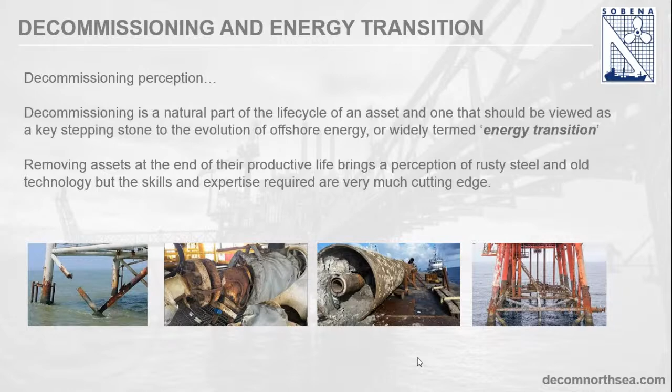The reality of decommissioning is it involves a lot of managing unknowns. And now, from an engineering point of view, that is exciting as well as challenging. It also involves controlling a lot of contaminants.

At the same time, you have to be very focused that decommissioning is perceived as a cost. So managing the costs while maintaining the safety standards takes a lot of focus and dedication. The safety standards also come into the environmental standards. The risk for damage to the environment is greater in the decommissioning stage than in any other. So the commitment to doing things right, not just safe, but doing the right thing, is a key part of the mentality around decommissioning.

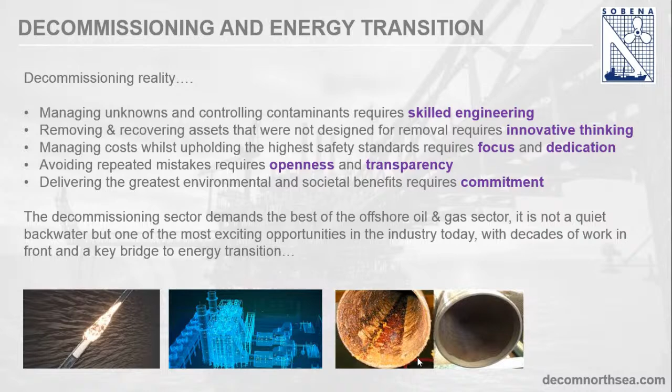So I guess if there's one thing I want to leave with you is you heard about the scale of the opportunity, you've heard about the changes in regulations and the fact that there's process, but the innovation required is not just about technology. It really is about a mindset and an approach.

I'll illustrate that with just a few numbers here. So new or advances in technology, and these are general numbers I've aggregated from different countries and around the world, so it's just a rule of thumb. The new advances of technology are estimated to reduce the cost by less than 2%. What that really says is a lot of the major advances in technology have been made.

We are still looking and very keen to make sure that there is more innovation, and you're going to hear some great ideas this afternoon. But there's no magic bullet that's suddenly going to reduce costs substantially. The way to reduce costs are going to come from taking the lessons and the experience from elsewhere and applying them so that you can manage and control those costs and the associated risks.

So effective sharing of the lessons and the gained experience, that can have a reduction in the cost of over 10%. A lot of that is making sure that your cost targets are hit. Overruns are very expensive. And a big impact on the risks, because a lot of those lessons are around managing the risks, avoiding the mistakes.

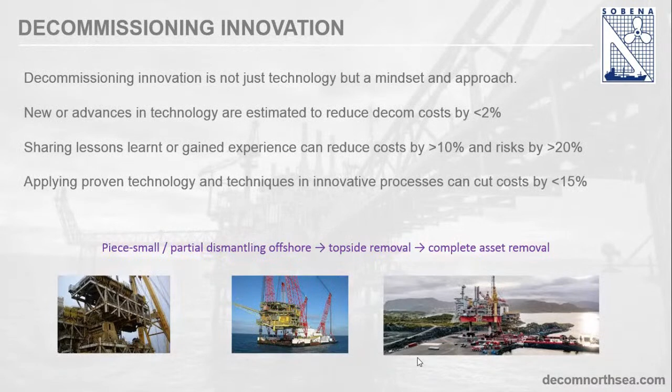So on that note, I'll just summarize. Most of the challenges, not all, because there's always the opportunity for something new, most of the challenges that you will come across in decommissioning have been met before.

Part of the challenge is finding the people and the experience that you can gain the knowledge from. The current knowledge bank, though, is vast and it continues to grow. And it's the most open part of the life cycle. People are generally quite happy to share.

Even down to the fact that for a number of operators and service companies, there's little commercial gain in not sharing, much more gain to be more open and to share that knowledge and share the benefit that comes from that. So the simple questions we all ask: how do I plug and abandon that well?

How do I recover that flow line? How do I clean inside? Do I lift the conductors in one piece or do it separately? These are standard questions, and the processes you've been talked about, there's a knowledge bank to go alongside that.

Most of that knowledge bank sits in the supply chain companies, and in some cases more sits with the companies in the supply chain than it does with the oil companies, the operators. So it was mentioned the need to look at partnerships in the past. That's very much the way the community, we call it the decommissioning community, that's the way it works.

As part of the university, which is my work, I'm always happy to see somebody bringing the innovative part of the work to decommissioning, because most people think that decommissioning is a job that is easier, and it's simple and can be done in a way that is always done.

But there is a lot of challenges in this, and innovation would benefit a lot for the oil companies, for reducing costs in these operations. It's quite important. Thank you very much.

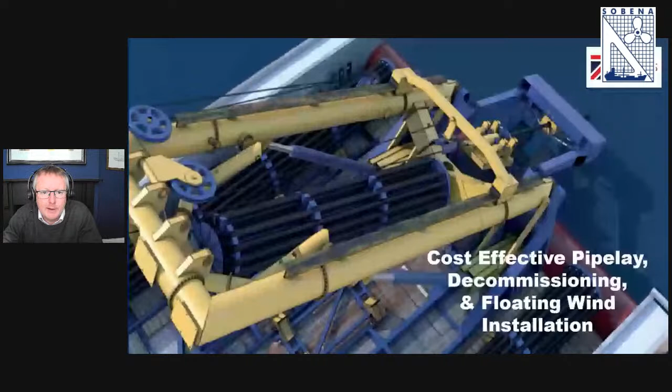Since establishing in 2017, we have developed a series of patent pending products for cost-effective pipe lay, pipeline decommissioning, and floating offshore wind installation, all utilizing smaller, cheaper vessels coupled with our innovative equipment to offer significant cost savings to clients. The ideas behind the system were conceived almost a decade ago.

Since spinning out the concept into Laytrix, we've been able to develop the technology through the support of our shareholders, including Mercia Asset Management, a venture capital firm who've invested by the Northern Powerhouse Investment Fund, which is backed by the British Business Bank and the British government.

The images on the screen show the system in its pipe lay mode and in a further flexible installation mode. We believe the system is unique in that it can install and recover rigid and flexible pipelines, cables, umbilicals, and bundles, all utilizing the same core structural and mechanical modules. As such, we deem this the world's most universal vessel asset.

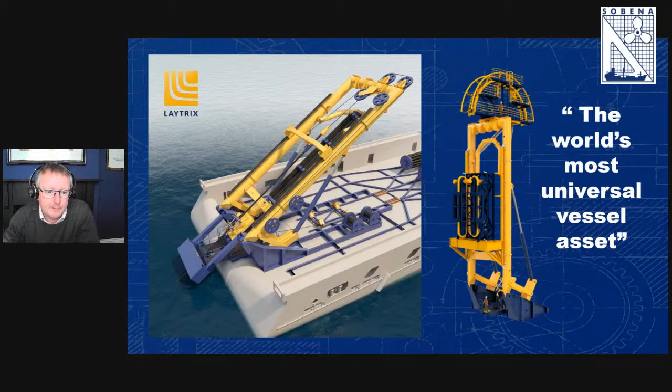So finally, on the business, Laytrix is targeting to meet 7 of the UN 17 Sustainable Development Goals, and we hope to achieve these by reducing the cost of offshore wind, using local content within our system builds, utilizing our innovative patent pending designs targeting carbon capture and storage alongside offshore wind, helping to clean up the seabed via our decommissioning spread, and maybe most importantly, utilizing global partnerships and a collaborative approach in everything that we do.

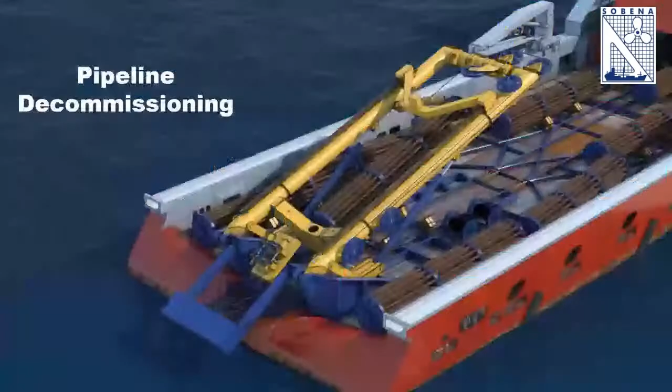So today's webinar topic is on decommissioning, and I'm going to concentrate on this mode of operation and try to explain the principles behind the system, the benefits we feel that it brings, and the large cost savings that can be attained using a different, innovative approach to decommissioning.

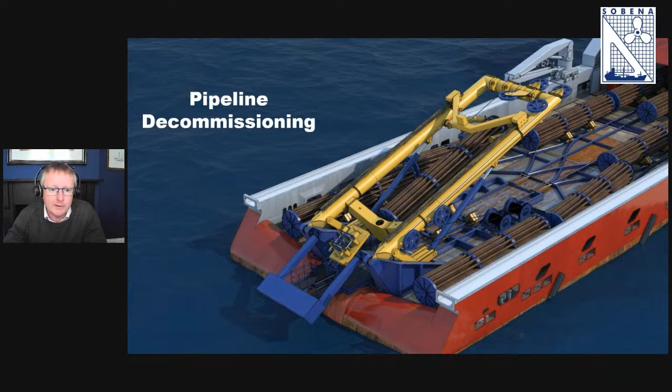I'm going to provide some thoughts from Latrix's perspective on opportunities within the Brazilian market. I'm going to share the results of a series of studies we've undertaken for several clients around the globe.

So the main design driver behind the system is that all the core elements, so structural, mechanical, hydraulic, and control, are all based on existing tried and tested offshore technologies. By combining these together in an innovative manner, we have a new build system which lowers the technical risk with a high TRL, or technical readiness level.

So some examples of the technologies that we've built into the system include ROV launch and recovery systems, bucket linkage designs for wide-angle A-frames, and components from carousel central bearings and reel drive systems. These are all areas where the design team have previous experience and are all items that are in everyday use in the offshore sector around the globe.

And finally, the design basis is against a range of internationally recognized design codes, including DNV and the Lloyd's Code for lifting appliances in a marine environment.

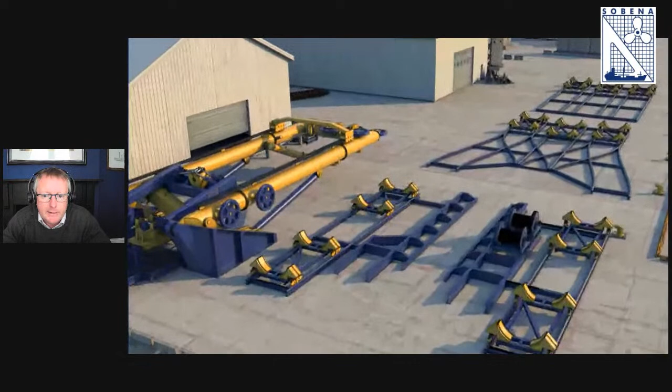So I'll finish on the engineering front, which is a key driver for the business, with a short animation which shows the system in pipeline decommissioning mode, which hopefully helps you to visualize it in operation.

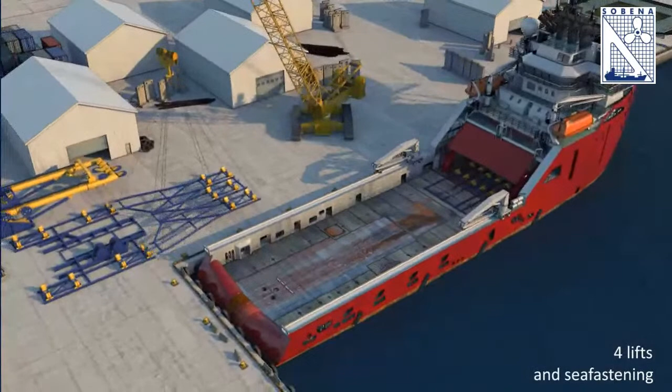So the system is designed for quick mobilizations, i.e. installing it on a vessel as quickly and cost effectively as possible. And we're looking to use vessels of opportunity, so ships that can be chartered on a daily basis with good availability across the globe, avoiding the more expensive and specialist ships. So examples would be PSVs, platform supply vessels, or anchor handlers.

So as a comparison, a platform supply vessel or anchor handler would typically cost in the region of $25,000 per day. And this would compare to $250,000 upwards for a dedicated pipeline vessel.

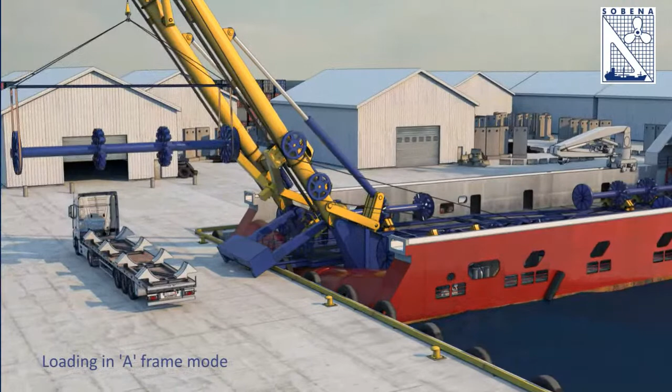So the system is patent pending, covering installation and retrieval of catenaries, which covers a wide range of service sectors and applications.

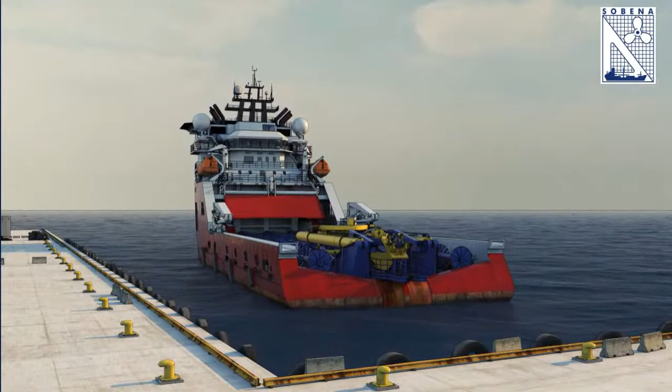So as I said, all of the components within the system are based on tried and tested technologies, and we've simply brought these aspects together in an innovative way, reducing the technical risk significantly.

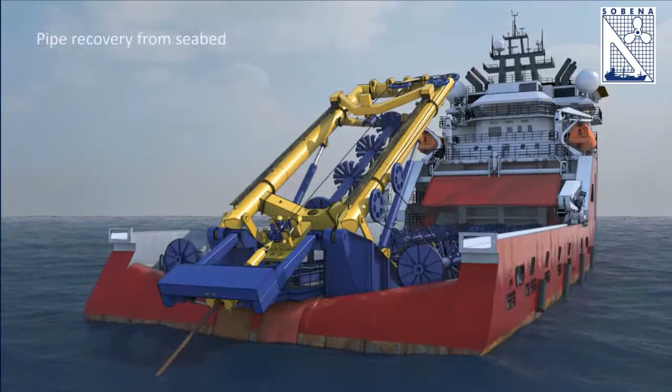So once the vessel's moved to location via an ROV, it will go down and latch on to the end of a pipeline and bring it up into our tower system. The system has two sets of clamps, a traveling upper clamp and a lower fixed hang-off clamp, and the process that we're calling a reverse J-lay process.

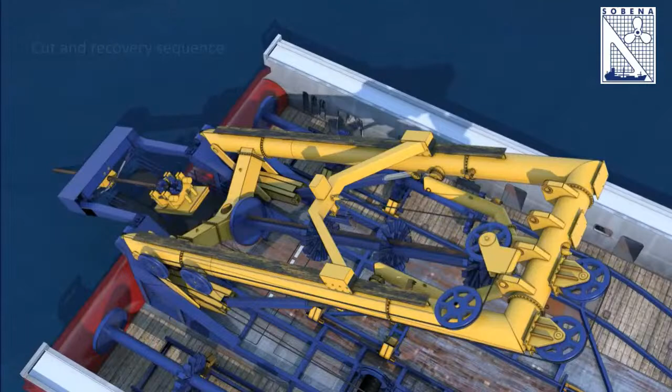We haul in a section of the catenary, it's clamped at the bottom, and using cutting equipment, it's removed and it's inserted into a pipeline cassette.

The process is repeated until the cassette is full, at which point the tower is folded to the deck while the catenary remains held in the lower hang-off clamp. The full cassette can then be removed, and an empty cassette can be placed back into the tower. The tower can move back to the required catenary angle, and the operations can continue.

So depending on the length and the type of product being recovered will dictate the type of vessel that can be used, the ideal deck footprint area, and the number of journeys.

Once the vessel's returned to port, we can put the system into what we call A-frame mode, which allows us to load and self-unload, effectively using a crane at the end of the vessel. This increases the range of vessels that we can use and helps drive down the costs. It also allows us to use harbours which haven't got dedicated quayside craneage.

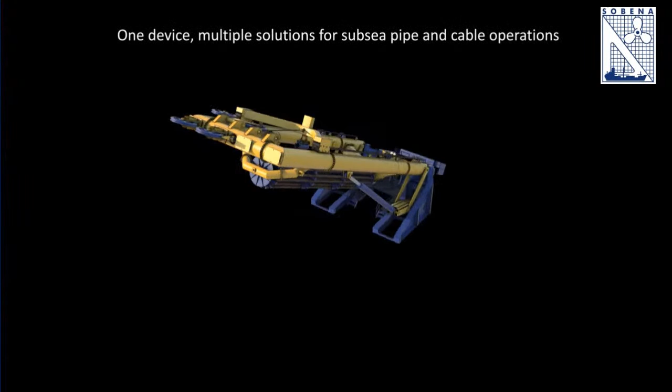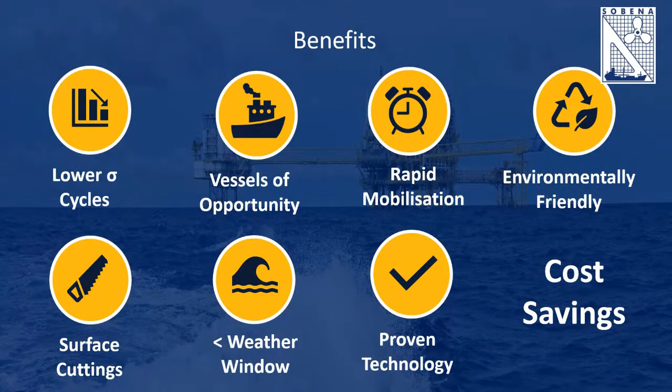We believe the benefits of our system over existing practices such as reverse relay and subsea cutting and grabbing are many, both from a technical and commercial perspective. The system is safer to use, avoids subsea working and cutting practices, ensures any spillages and cutting materials are contained on deck, and allows operations in increased weather windows and with vessels of opportunity, which can be utilised in smaller ports or harbours with decreased draft. All of this leads to significant cost savings which are passed on to the end user.

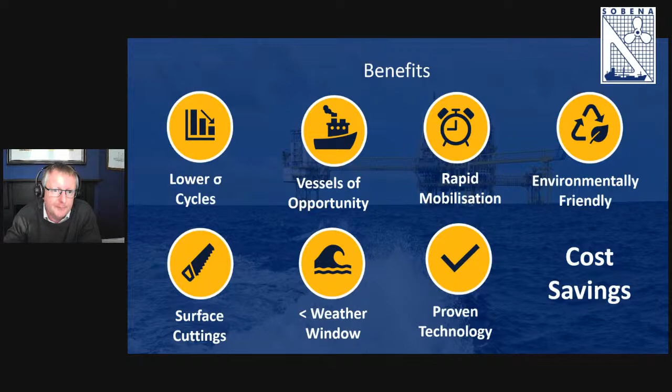In the UK, around 48% of the pipelines are within the sweet spot of our system, which is looking at diameters in the range of 2 inches to 16 inches, which fits in with the capacities of our cassette-based system.

Above these diameters, our system can still be used, but without the cassette, for recovery of larger diameter pipelines or bundles, with the sections cut from the catenary and lowered from the tower onto deck trolleys, which take the place of the cassettes within the tower. If you're interested in finding more about that, you can view a bundle recovery animation on our website.

Turning our focus to Brazil, Laytrix has been involved in discussions with the Brazilian market over the last 8 months, with support from the UK Department for International Trade. We're starting to see some real momentum in the sector and projects coming out to tender.

As Mauro mentioned in the first session today, the announcement before Christmas of the Petrobras tender for engineering, preparation, removal and disposal of almost 1,000 kilometres of flexible pipeline with a mass of over 55,000 tons shows one of the major opportunities within the Brazilian market, and something that we hope we can play our part in reducing the total decommissioning costs in the sector.

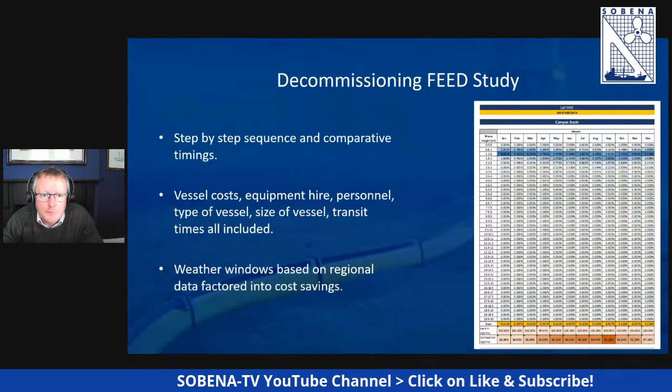Over the last 12 months, we've undertaken a range of different desktop studies or feasibility studies for operators across the globe, including pipeline and bundle recovery projects in the North Sea, projects in the Far East and projects in Brazil. Over the next couple of slides, I'd like to share some of the results of this work.

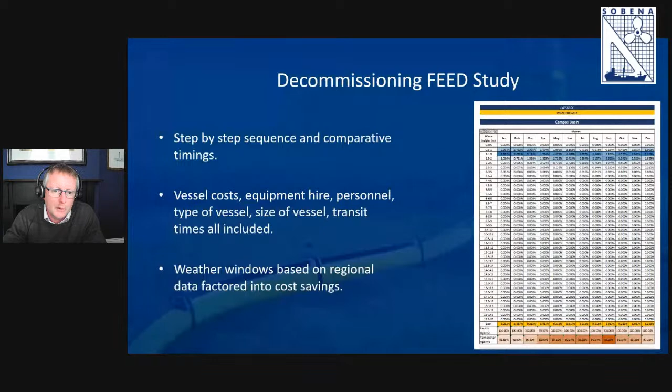All of the studies have compared the costs and timescales using a large number of inputs, including vessel rates, equipment rental costs, personnel costs, step-by-step operational sequences, and regional weather windows and wave height limitations to build in the probability of time delays during planned operations. Our costing software, developed internally, also examines the field location, port and harbour locations, and respective transit times and distances, and the resulting costs, which are all built into the comparative assessment.

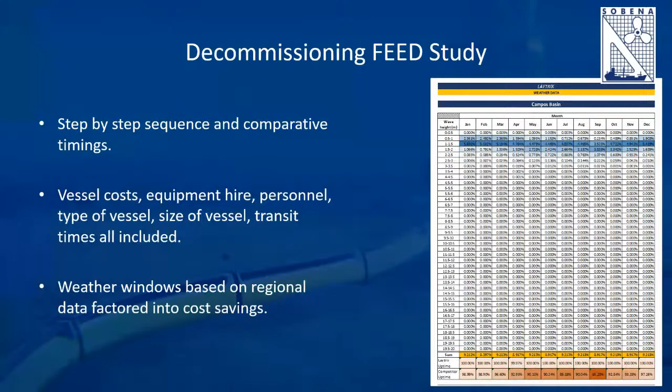I'll give two examples. The first case study summarises a desktop report undertaken on behalf of an American operator for one of their business units in the Far East. This looked at recovering multiple pipelines of various lengths and sizes in the range of 2.5 inches to 15 inches in diameter in water depth around 150 metres.

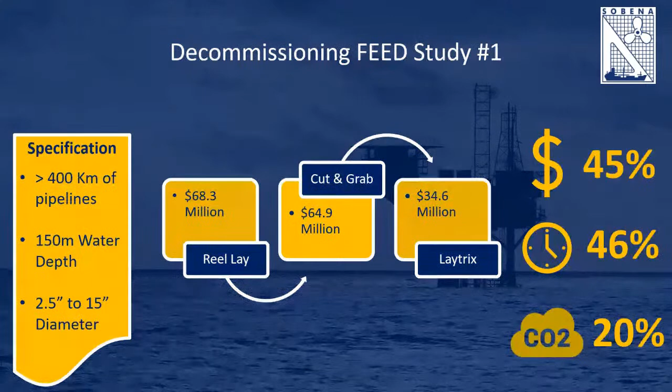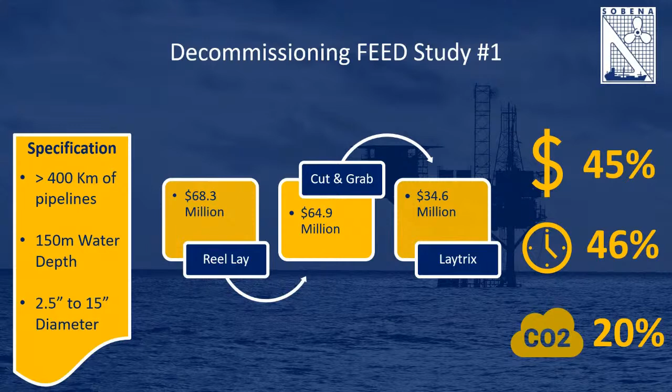Our system was compared against a number of other decommissioning methods, including subsea cut and grab and reverse reel lay recovery, with the results showing significant cost savings of 45% versus the nearest competitor and time savings over half the client's default option. In addition to this, there are also large savings in the amount of CO2 equivalent emissions during the operation due to the speed and use of smaller vessels with our technology.

So the second case study was undertaken more recently, associated with a project in Brazil, working alongside a vessel operator and our partner Centric Energy, comparing the total costs of recovery and offloading against a pipeline vessel. The basis for this work was utilising our flexible recovery solution, again using a smaller vessel of opportunity, and accounted for multiple return trips with the smaller vessel compared to a single journey with the larger PLSV.

The cost comparison included the time spent for unloading recovered products with both methods and also the associated harbour costs. This led to a significant saving of around 40%, including contingency costs, which were built into the Laytrix approach. I think this compares quite well with some of the numbers presented by Marcelo in the earlier session, showing the benefits of platform supply vessels and vessels of opportunity.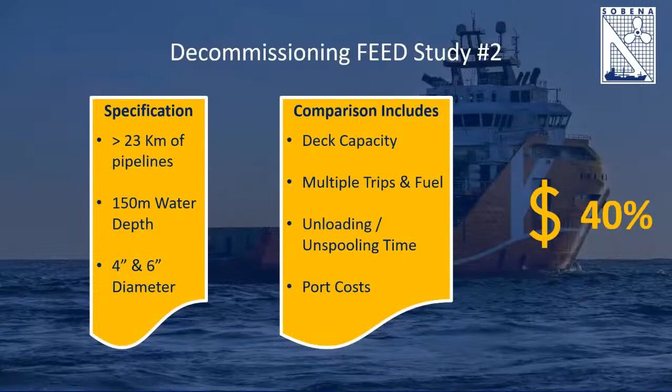So just to recap, Latrix is an innovation-led, offshore-focused startup with a pending IP portfolio. We have exposure to multiple global offshore sectors, including pipelay, wind, and carbon capture and storage, with a focus currently on the UK and international decommissioning markets. We have local representation in Brazil via Centric Energy and have started to develop a dedicated system for the Brazilian market.

Finally, we've undertaken a range of studies across the globe, validating the cost savings against a range of different metrics. So I'll finish with a quote which I believe sums up our approach in a single sentence. We'd be pleased to hear from investors, suppliers, or clients who can help us develop further in the Brazilian market. I'd like to thank you for listening. If you'd like to visit the website, there's a range of animations showing how the system works in its different modes of operation and further details of its advantages and benefits. Thank you for listening.

Thank you, Andrew. It was a very interesting presentation. I do believe that these innovative solutions may help a lot with the decommissioning here in Brazil. As was highlighted by Destry in his presentation in the previous section, we are at the tip of the iceberg for all the opportunities here in Brazil, and I'm glad to see that we can bring innovative solutions that may help reduce the costs of these operations. Thank you for your presentation. Thank you, Marcelo.

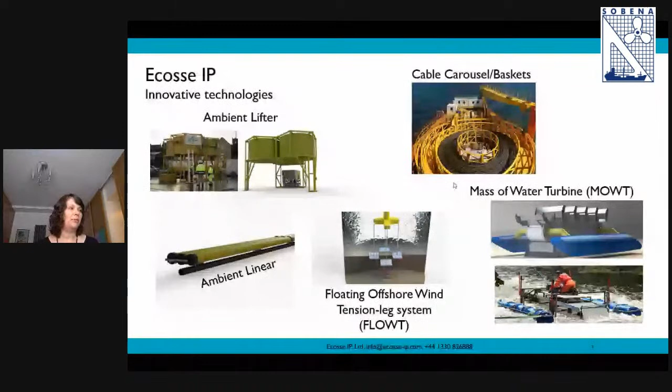So I'll be focusing today on our ambient lifter family. We like to develop very simple, robust engineering, because with a track record of many of our engineering team from a lifetime in subsea, we know what a tough environment it is. So we like to make things simple, robust, and make sure that they work in tough conditions.

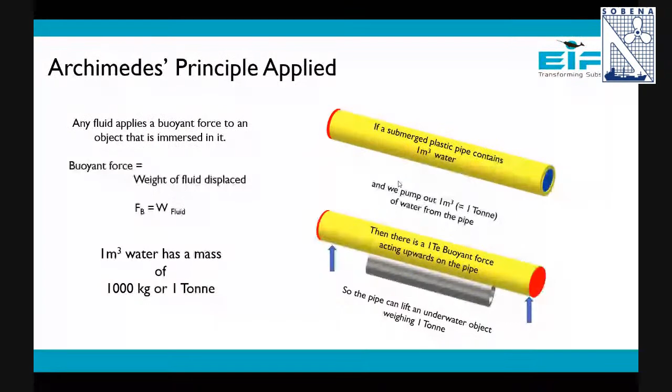The simple principle behind the ambient is Archimedes' principle, a 2,000-year-old principle. When Archimedes jumped in the bath and the water was displaced, he said 'Eureka' - that is what ambient works on. The buoyancy of a pipe corresponds to the amount of water that is pumped out of the pipe. That's why big metal ships float, and why our ambient lifter floats. If you pump out 1 ton of water, you get 1 ton of upward buoyant force. That's exactly the simple principle our technology is based on.

I'll talk a bit about some of the developments specifically in decom of our tools. We've developed what's called an ambient linear decommissioning tool, which allows adjustable buoyancy so that we can fly long, thin things underneath the water. We can adjust the buoyancy to bring them to surface, or adjust it to lower them gently to the seabed. That can be used in the vertical or horizontal position. Many of the flexible issues we've been discussing with potential clients in Brazil will be dealt with using some version or extension of this tool, but it's the same principle for all.

The tool consists of the yellow pipes, which are the buoyancy pipes, and they will be sized based on what we are lifting. The controls and manifolds which control the buoyancy give very, very fine control, because we're not controlling air in and out, we're controlling water in and out, and that can be controlled kilogram by kilogram lift.

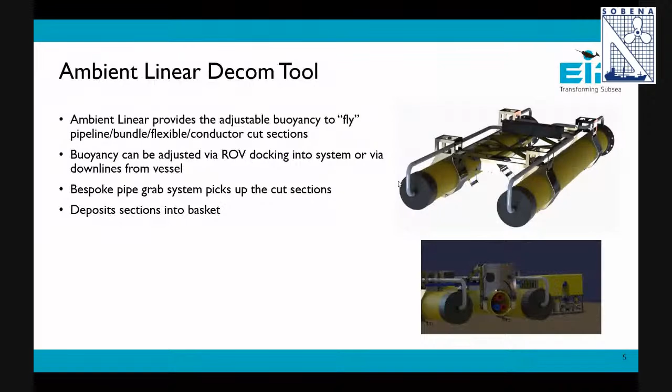An example of decommissioning bundles, flexibles, or pipelines: if there are no hydrocarbon issues with them and they have been cleaned and flushed, then they can be cut into sections, placed into a bespoke basket which EIP have also developed, and taken to shore on an anchor handler vessel, winched up by the winch. The benefits are we have a low-cost vessel that can deploy the ambients - we don't need a crane lift vessel, and we're not affected by what's going on at the surface. Once the tools are down there, they're working well, and it gives manageable sections. So these methods could be used for all sorts of decommissioning of flexibles and other long, thin elements subsea.

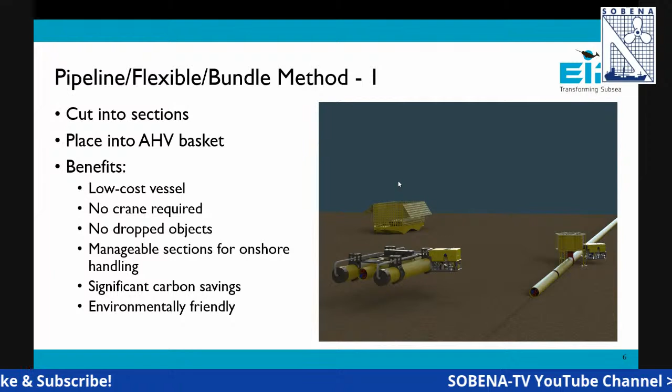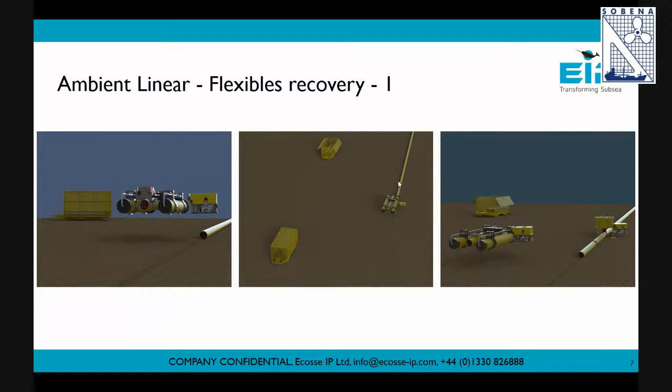This shows the different elements of it. On the right-hand side, you'll see the ambient lifter deploying a shears tool to cut the sections, ambient linear with the ROV in the foreground, and it'll then fly and float the sections of pipe into the basket for recovery. The beauty is that operations can continue while the anchor handler vessel shuttles back and forwards.

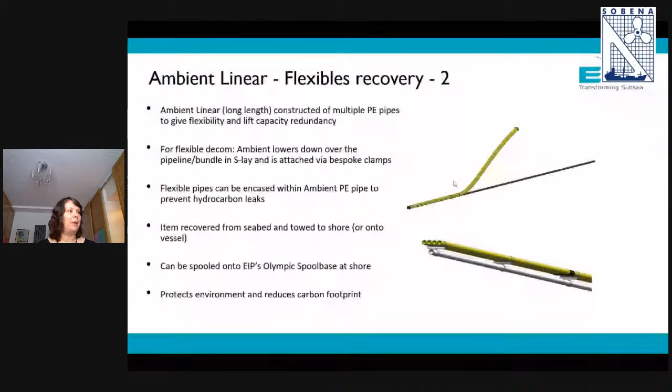The other thing is that the environmental protection inside our ambients are only seawater and air, so there's no danger of leakage. And in terms of using a much lower cost vessel, we're using a much lower carbon footprint in terms of the vessels we're using, and we're very environmentally friendly. So it gives us a number of different benefits as well as being cost effective.

So looking at FPSO flexible removals, obviously this is a big issue in the Campos Basin and something that Brazil very much needs to solve.

Traditional methods look at using heavy lift vessels, crane vessels, taking the flexibles, clamping them, cross-hauling them under the vessel, attaching them to clamps. It's a long, laborious, expensive, and carbon heavy process because you've got a heavy lift vessel alongside the FPSO for a long time within the process.

So instead, we're looking at the ambient decom tool. It clamps onto the flexible. The process to disconnect the flexible from the FPSO remains largely the same, but we can clamp on to the flexible and make it neutrally buoyant, so there's no downward pressure on the flexible while it's being removed and the disconnection is being made, which makes it much easier.

We can then gently lower the flexible down to the seabed and repeat that process with multiple tools, multiple ROVs, if time is of the essence. We can remove all the flexibles one by one from the vessel very quickly and cost effectively, and environmentally friendly, allowing the FPSO to return to shore for decommissioning, while we come back and do the decommissioning of the flexibles from the seabed, disconnected from having to work with the FPSO. This allows decommissioning as quickly as possible, minimizing leaks and significantly reducing cost.

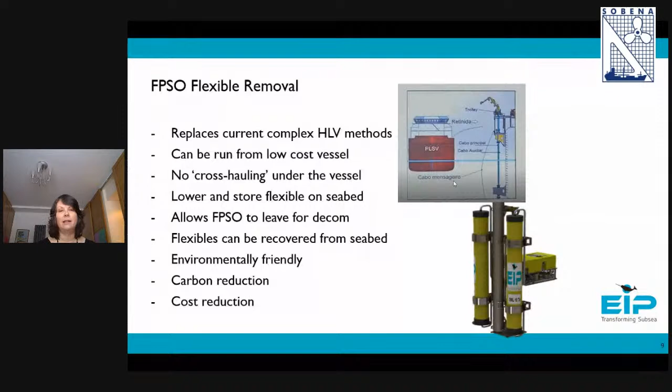Conductor removal for platforms with conductors. This is a big headache in the UK sector, because there are many platforms with multiple conductors approaching well beyond their design life. This is something we've been talking about with a lot of UK operators, and it's also pertinent in Brazil. So again, using a version of the ambient linear decommissioning tool, and a bespoke conductor basket.

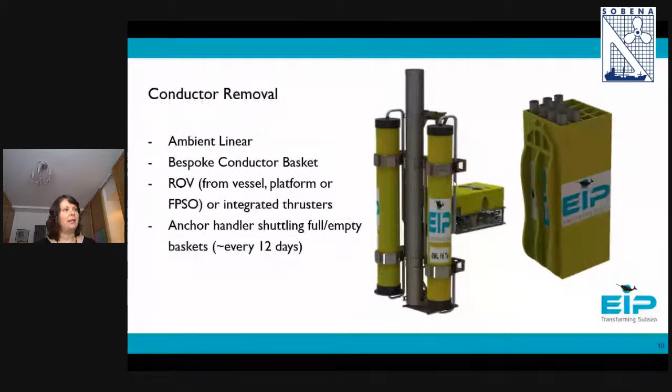We'll partner with cutting companies to either put on specialized shears or diamond wire tools, and we'll put on multiple diamond wire tools if that's the method we use, to make sure we've got redundancy. The ambient linear will clamp onto the conductor using a hydraulic G-clamp and pin, and will cut that section of conductor from below the platform, so there's no need to pull the conductor up onto the drill floor to carry out the cuts. This can all happen subsea, without interrupting any of the topside operations.

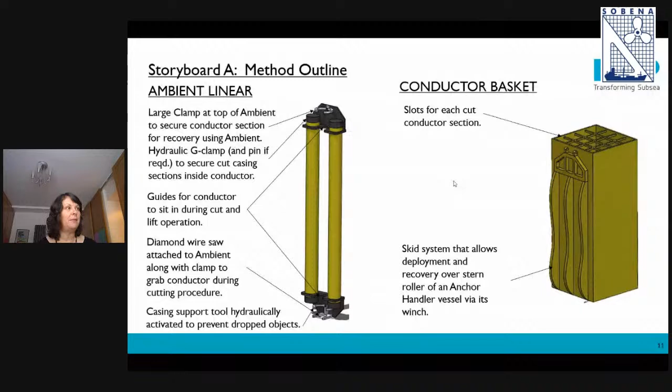Particularly if you've got simultaneous operations where you're still producing from that platform, but need to decommission some of the conductors, some of the wells, because of integrity issues, for example. The other beauty is that we size it to go in between the conductor guide frames, so you don't have to take conductors with additional clamps and anodes through the frames. You can maneuver them out from underneath the platform, either with an ROV from the platform itself or from a vessel, working independently of any operations on the platforms.

We use a boat basket, which has a skid system we've used previously, and that allows the cut sections to be taken onto the back of an anchor handler vessel and returned to shore. That vessel can return back and forwards to shore intermittently, so it doesn't have to be sitting waiting throughout the whole operations. Again, saving carbon, saving cost, looking after the environment.

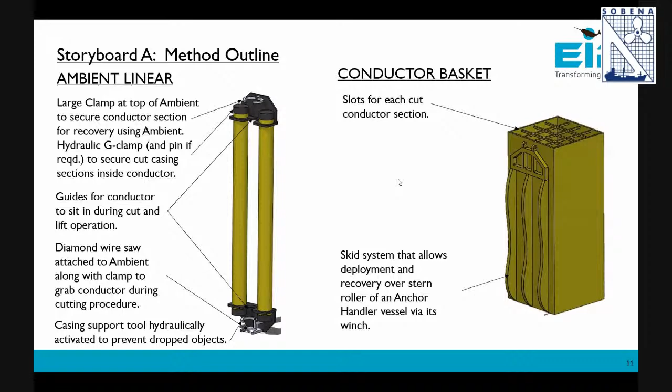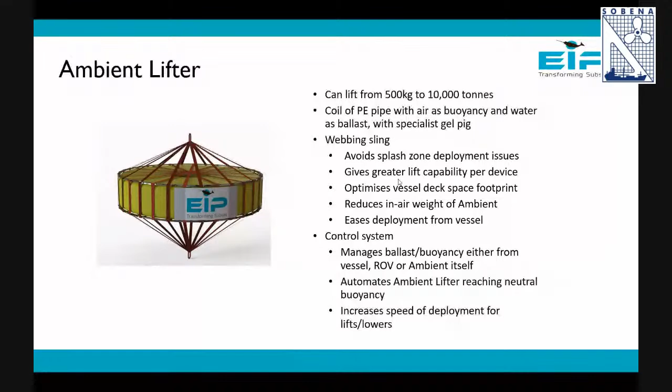Finally, our ambient lifter tool, which can be sized. It's a coil of PE gas pipe, the ballast is water, the buoyancy is air, and there's a specialist gel pig in between. It's deployed with a webbing sling, avoiding any splash zone issues, and can be sized accordingly. You can technically make one of these lift 10,000 tons. But if we want to decommission larger small structures, we can attach those through a bespoke lifting frame and remove them. We've been looking at removal of very large, up to 1,000-ton manifolds in the North Sea.

This is something the operators are very keen on. We've presented through the Oil and Gas Technology Centre and to a number of different operators looking at these methods, because you're avoiding the expensive heavy lift vessels, which is going to be an issue in terms of Brazil and the availability of vessels also.

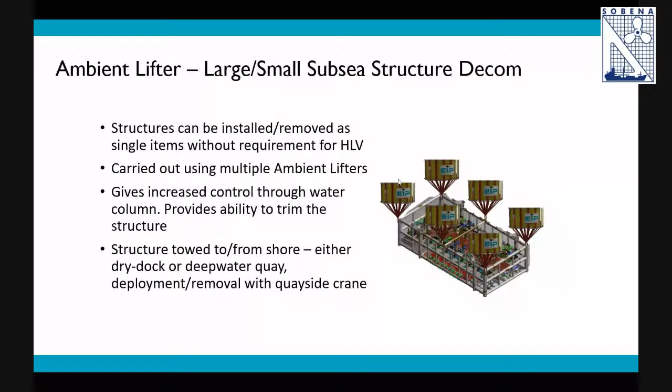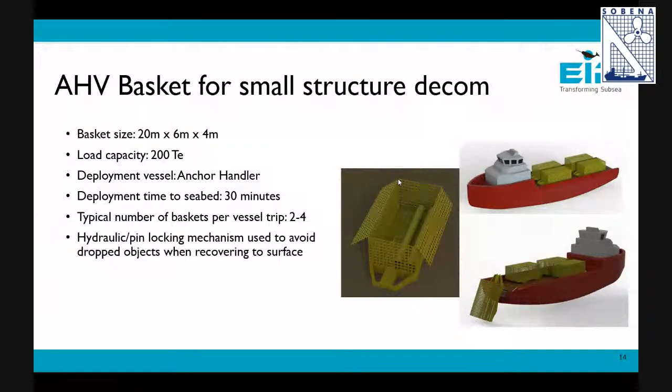We've also looked at how to get items from the seabed to the surface, such as small structures like trees, small subsea items, and as we talked about earlier, the cut sections of flexibles, of pipelines, of bundles, etc. So we've developed a basket mechanism that can be hauled onto the back of an anchor handler, and that can be used for any kind of decom debris, available for whatever it is we're decommissioning, to avoid the issues of how we take things onto the vessel deck.

Finally, I want to tell you a little bit about how we're looking at different projects to prove our technology. There's a simulator, linked in Rio also, looking at the full physics and real-time environment modeling. It looks like an animation, but it's actually working on all the physics. We can model your asset with our systems and make sure it's all going to work, allowing you to run it in the most effective way possible. For example, Equinor uses this extensively to plan and run projects beforehand, to increase safety and reduce costs.

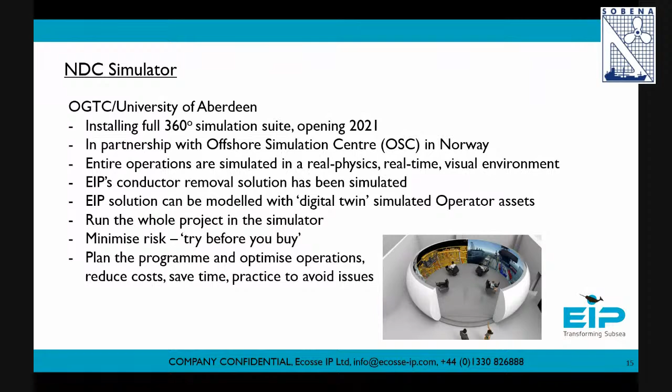So I'll just run a quick simulation to show you the conductor removal, for example. I hope you can see that now. That's basically running the simulation with the full physics. I'm not sure if that's visible to you, so I'll just run on.

To finalize, we're very serious about the Brazilian market. We've appointed P&S engineering consultants, Marco and Jairo, who are very experienced in the Brazilian market, and we're delighted to be working with them as they interface with operators and other companies we'll be talking to about bringing our technology here. The beauty of our technology is it's simple, it's robust, it can be assembled in country, it doesn't need to be towed from the UK or other waters. We can assemble the items in country, and we're very keen to create a proper local presence in Brazil and develop technology that benefits the whole industry.

So if you want to find out more, please contact ourselves, but more importantly, please contact Marco and Jairo, and they'll be able to tell you more and integrate our technologies into your solutions. We're really keen to help. We're excited about the possibilities of how to approach decommissioning in Brazil based on our 10 to 15 years of experience in the UK, and we'd be very keen to work with you. Thank you very much.